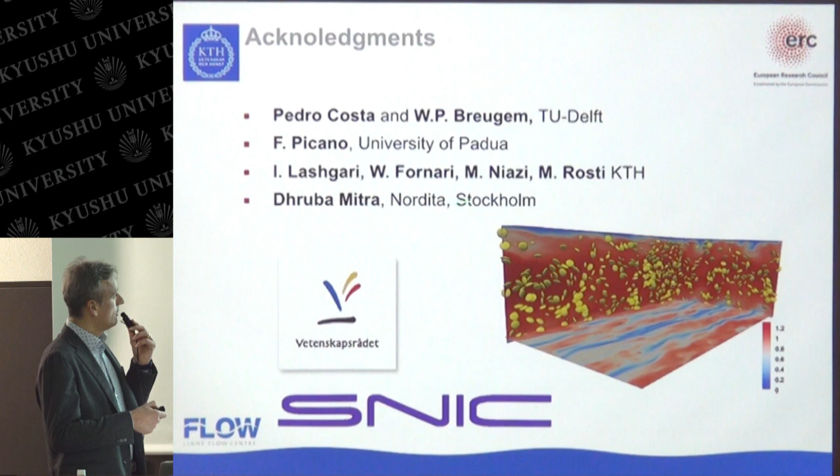Let's start by acknowledging many collaborators. We can start with, for example, Pedro Costa and Wilhelm Breugem from Delft in the Netherlands, who contributed to the development of the numerical code. Then we have Francesco Picano, who was a postdoc at KTH and now moved to Italy, University of Padua. I also listed here some of the students at KTH who were involved in this project, but also Dr. Mitra from Nordita, the Nordic Institute for Theoretical Physics in Stockholm.

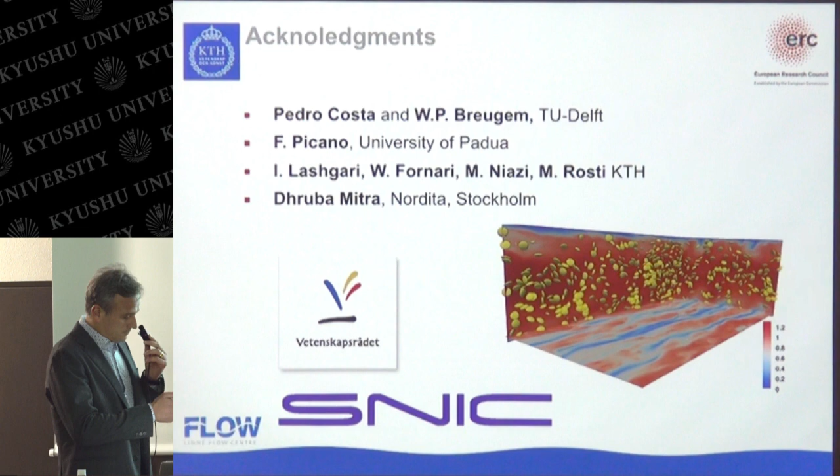So as we start, what we want to study is suspension of rigid particles, and these are found in many natural phenomena, for example pyroclastic flow, sediment transport, and many other applications. And of course these flows with particles are very important in industry.

One can mention that about 10% of the world's energy consumption is used to transport solid materials through fluids. So what we want to do is understand the transport and mixing in these suspensions that we find in many industries, fluidized beds - something I will shortly mention later - but also waste slurries, for example.

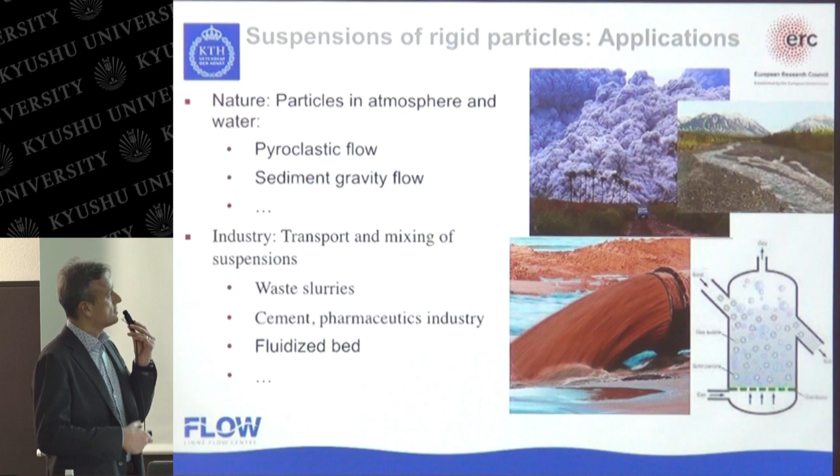So let's see if this microphone works. If we focus more on the scientific point of view, what is the scientific challenge here? Is it on? Hello?

So as we said, suspensions are everywhere. You can find them in several different fields. And from a scientific point of view, the motivation is to consider dense suspensions and to consider finite inertia. What I mean with dense suspensions is that the distance between particles is of the order of the particle size, so that we have to consider all possible interactions - collisions, short-range interactions, hydrodynamically mediated interactions - all contributing to the dynamics of the suspension.

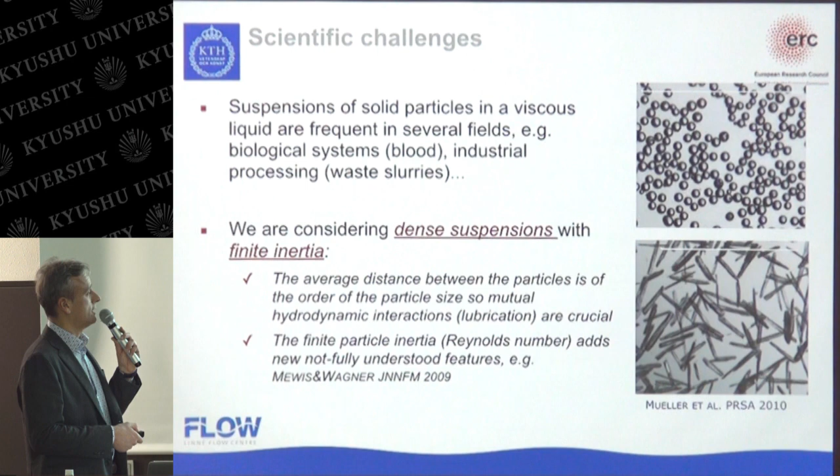At the same time, we will not study strictly the rheology of the suspensions, but we will assume the flow is happening at finite inertia, basically in practice finite Reynolds number, because that's the most common case in industry and in many applications. So we will consider the flow to become turbulent, not only simple laminar flows.

So this is more or less the outline of the talk. First, I will talk about the numerical tools, how we want to study these numerical particle suspensions. Then I will talk about flow in channel flows and the role of turbulence. At the end, I will include additional effects that we are modeling - particles of different shapes, heat transfer in the suspensions, and so on.

As I said, most of this work is based on large-scale numerical simulations, requiring typically from 1,000 to 4,000 cores for one case, for some of the cases I will show here. So we have to develop efficient and accurate algorithms that can run on these large supercomputers. When it comes to multi-phase flow, it's always a question whether one is doing real direct numerical simulation, or if there are models in the simulations. In our case, of course, we will have to model the interaction between spheres and solid walls, or collisions between spheres.

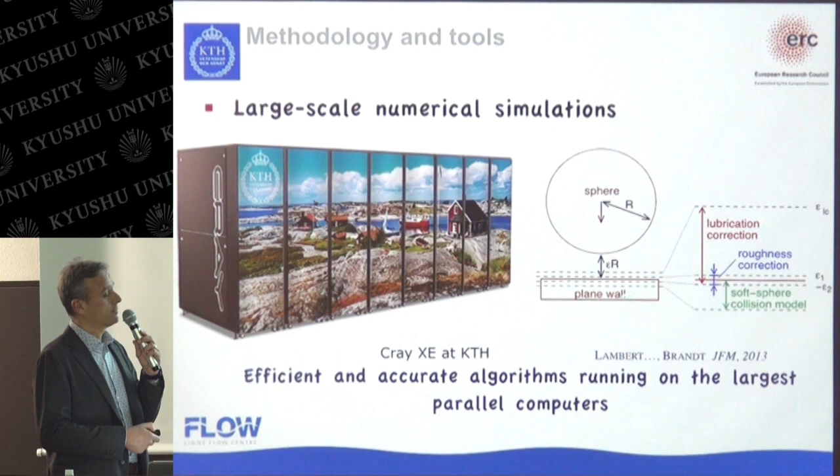So what we're going to solve is basically a Navier-Stokes equation for a fluid, here written for an incompressible fluid. Typically we consider particles that are neutrally buoyant or slightly heavier than the fluid, so let's say this is a typical equation for water, governed by this Reynolds number.

And then we solve the Newton-Euler equation for spherical particles, or for particles of different shapes. That's basically an equation for the linear and angular velocity of the particles in the flow.

The problem, of course, is what is called the curse of the boundary conditions. Basically what we have to do is impose a boundary condition, which in most cases will be no slip and no penetration at the surface of these particles. And these particles are of the order of 50,000, 100,000, and they move in channels and pipes, meaning we need to impose boundary conditions on moving surfaces.

For the first part of the talk, this will be the no-penetration condition of the fluid into the solid particles. But as I'll mention briefly at the end, we are now looking at evaporating droplets for fuel sprays, for example, where we'll also have boundary conditions on heat and mass transfer across this interface.

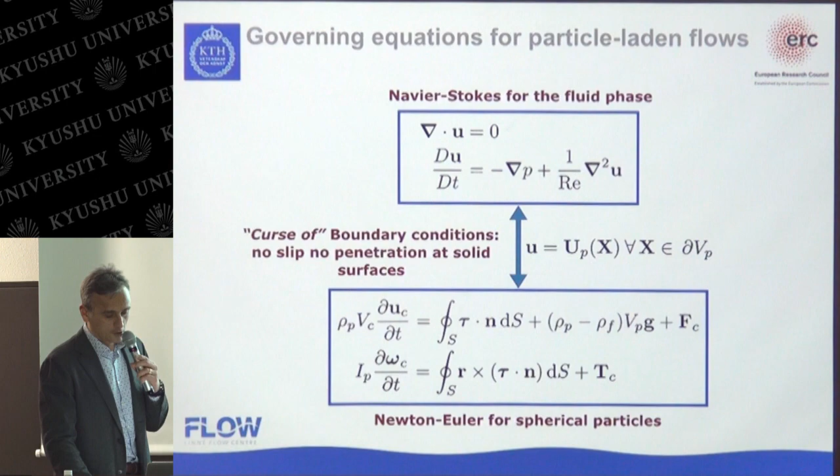But for the first part, we will talk mainly about these rigid particles and how we model the boundary conditions. This is done by what is called the immersed boundary method.

Basically, the method reduces to solving equations on two different grids. This red mesh is basically an Eulerian grid — we mesh our domain, which could be a channel or a pipe, and then we solve the Navier-Stokes equation for the fluid phase on this regular Cartesian mesh, which can be done efficiently because it's a very standard approach.

But then when it comes to the solid body, we basically assume a set of uniform Lagrangian points attached on the surface of the particles, in this case a sphere. So we have these black dots which represent a mesh on the surface of the particles, and they are more or less equally distributed.

In this way, we don't need to follow the particle, but we can keep the same background mesh and just add an additional forcing term into the equation for the fluid. This additional forcing term is basically mimicking the presence of the particle.

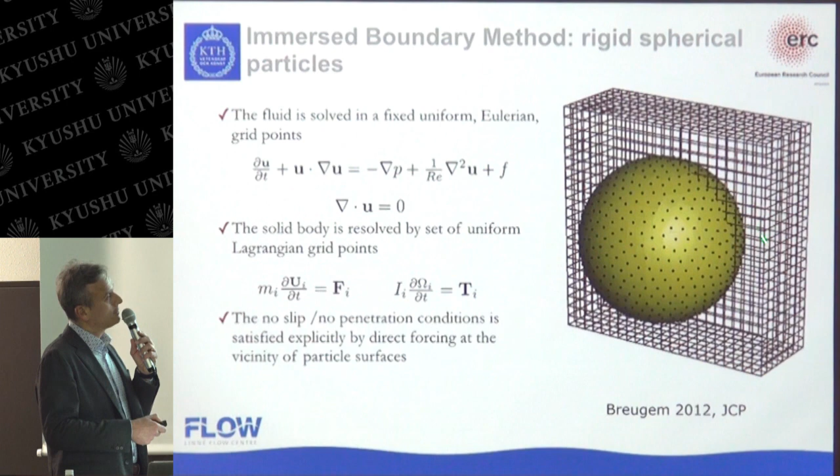Of course, this requires additional computational costs, but not as much as remeshing and following different particles. This will also require sufficient resolution — typically, to well resolve one particle, we need the diameter of the particle to span at least 24 grid cells.

Now, this is how we solve the equations for particles immersed in a fluid, but of course at some point we need models for interaction between spheres with each other, or spheres at the solid wall.

The thing is, because we use a fixed grid, at some point if a particle comes too close to the wall, we will not be able to fully resolve the fluid in between the particle and the wall — we won't have enough resolution. At this point, we will have to model these interactions.

Basically, we implement corrections based on analytical solutions for interaction between two spheres, or a sphere and the wall, and these are added as corrections to the lubrication force between the sphere and the wall. Of course, we need a certain threshold below which we activate this correction.

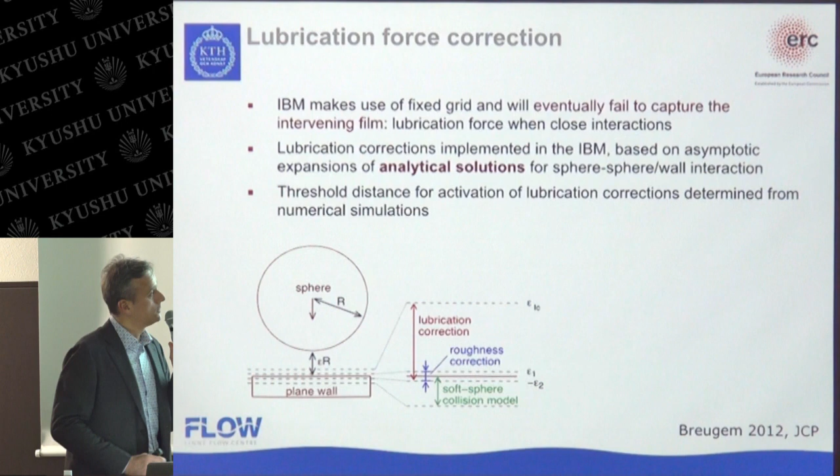So that's the first correction we do: we estimate better the lubrication force, the force due to the thin layer of film between the particle and the wall. The problem is that this analytical solution becomes infinite as the gap width goes to 0.

So at some point we cannot let this distance go to 0, so we introduce a roughness correction, so that when the distance between the particle and the wall is of the order epsilon, typically about 1% of the particle radius, we cut the lubrication force.

We assume there is some finite lubrication force due to the presence of roughness. But eventually, since we are considering turbulent and inertial flows, there will be a collision between the particle and the solid wall. In this case, we adopt some collision model.

We use the soft sphere collision model. The characteristic of this model is that it allows a little penetration of the particle into the wall, but still of the order of 1-2% of the particle radius.

This is done because we don't want to pay too much in terms of time step. If we have a more rigid collision, we have to decrease the time step. Allowing the particle to penetrate a little bit into the wall enables us to have a longer time step, so the simulation is more reasonable.

Okay, so this is the method. Basically, we have the particles immersed in the fluid, each particle associated with a Lagrangian mesh, and we track the particles into the fluid, then exchange forces between the fluid and the particle.

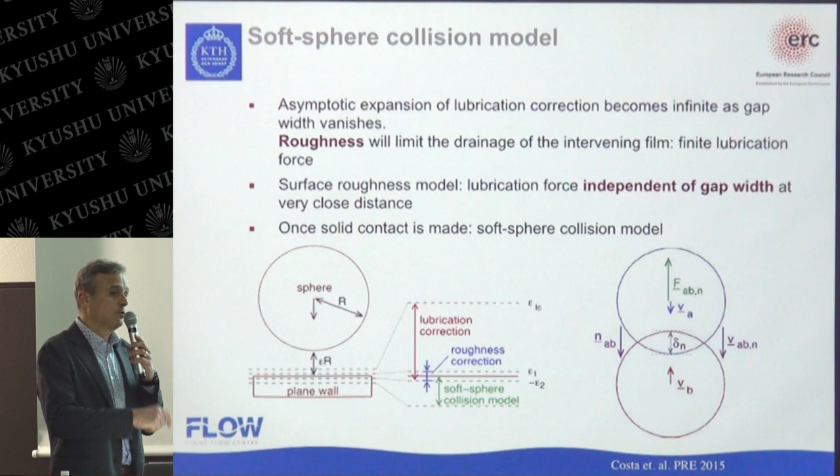So let's go now to the results. I want to first talk about the different flow regimes in channel flows, because this was already an open question when we started this, in 2012, 2013.

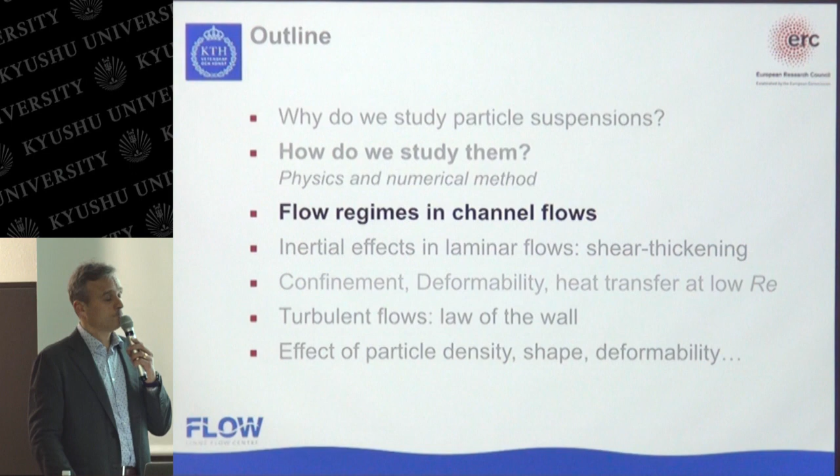So we want to know what kind of flow we have in a channel or pipe when we have many relatively large particles. We consider particles which are relatively large compared to the pipe diameter, as in many applications - for example, we have a project with Tetra Pak we'll mention later, where they're interested in transport of relatively large particles.

And so the question is, what type of flow do we have? First we want to refer to experiments by Matas, Guazzelli, and Morris, published in 2003 in Physical Review Letters, where they look at neutrally buoyant finite-size particles in a pipe, and look at the spectrum of the pressure drop between the entrance and exit to determine whether the flow is laminar or turbulent.

And so this is the results. This is basically the Reynolds number, a kind of non-dimensional inertia - so Reynolds number is proportional to the flow rate. And then we have the result, and this is phi, the particle volume fraction, the percentage of the volume which is the solid phase - so it could be 30% particles in a unit volume of fluid and particles.

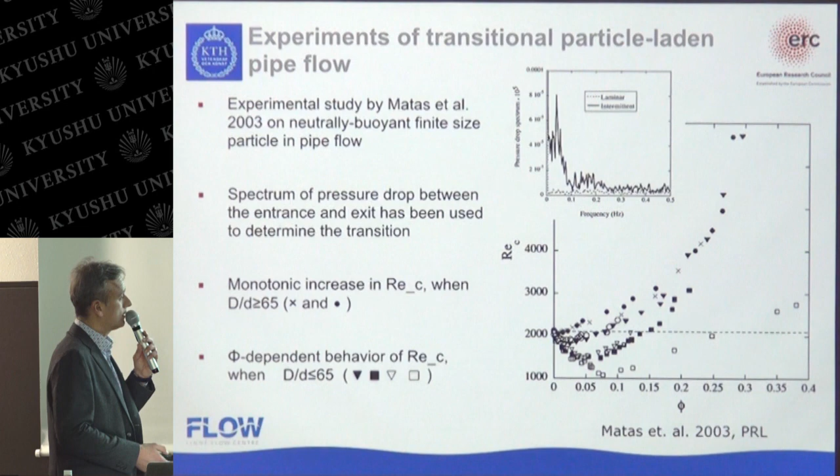So what we see is that there is a non-monotonic behavior for relatively large particles. The critical Reynolds number for the onset of turbulence first decreases, so it's easier to have turbulence, and then increases - so that when you have many particles, the flow seems to stay laminar for a longer period, which we'll show later is not really the case somehow.

These were experiments, so what they did also is say, okay, since we have particles in the flow, in water, what we do is consider an effective viscosity of the suspension, which is basically the viscosity enhanced due to the presence of the particles, as in classical rheology studies.

So you have an increased viscosity due to the presence of the particles, and by doing that, they see that if the particles are relatively small, about 1/50 to 1/60 of the diameter, the critical Reynolds number is more or less constant.

But for larger particles, we observe again a decrease in the critical Reynolds number, and then a kind of plateau. So they mentioned it's not clear what's happening in the flow with relatively large particles. It seems there is some additional dissipative mechanism.

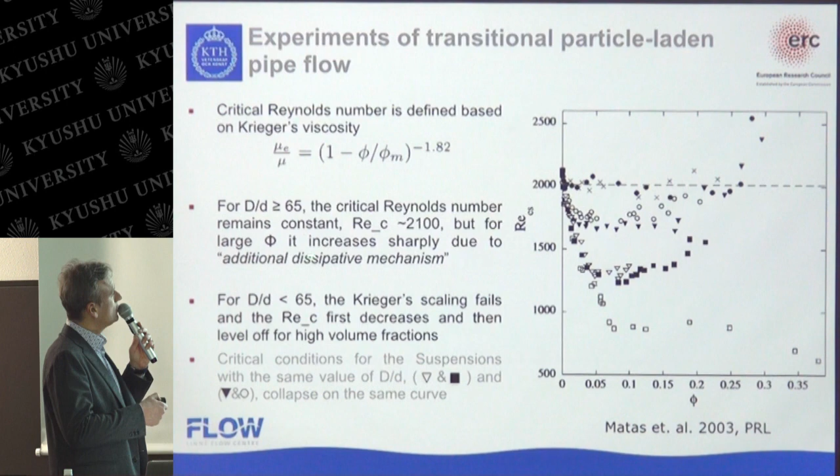More or less at the same time, as we started this work, a group in China, I think Tsinghua University, performed simulations with a method similar to ours, trying to reproduce the experiments. This is for one case, of course, since the simulations are very expensive.

At first, the critical Reynolds number, the onset of turbulence, is earlier, but as we increase the number of particles, the onset of turbulence is delayed. But when doing that, these authors also noticed they had somehow to find a way to define if the flow is turbulent or laminar.

They used as an indicator the kinetic energy of the perturbation, and selected a certain threshold. But they write in the paper that they selected this threshold such that they could get qualitatively good results, qualitatively reproducing the value of the critical energy.

But of course, this threshold, changing this threshold value will also change the results. So again, there is something that was not clear.

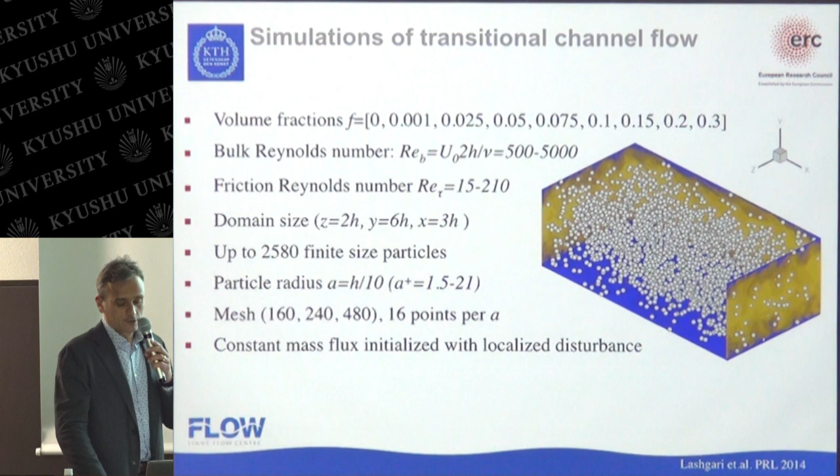And the particle radius is about 1/10 of the half channel width, which is exactly as one of the experimental data sets.

So now, first I want to show you what happens in the flow if we look at the velocity, the fluctuations in time of the flow. Basically, this is the kinetic energy of the streamwise velocity fluctuations.

We see that this is 0.1%, which is really like, I think, 5 or 10 particles in the whole channel. Red colors represent low Reynolds number, and more purple-like colors represent higher Reynolds number.

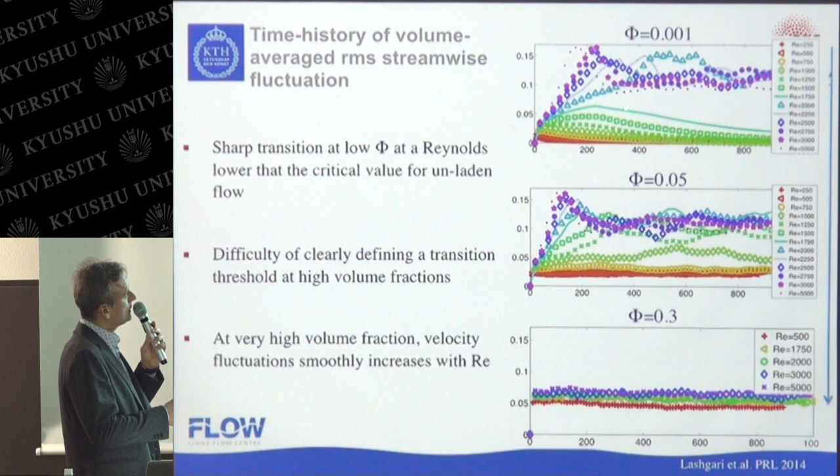We see that we excite the flow, we disturb the flow, and then as we wait some time, if the Reynolds number is low, the flow will be a little bit chaotic, and then the perturbation will decay, so that eventually we will get back to some kind of laminar smooth flow.

But if we have a higher Reynolds number, larger than 2,000, then we see that the flow will go turbulent, and we will have sustained oscillation fluctuations in the flow.

If we have 5% particle volume fraction, then in the presence of particles we can still distinguish two regimes. At low Reynolds number, the flow settles to some level of fluctuations.

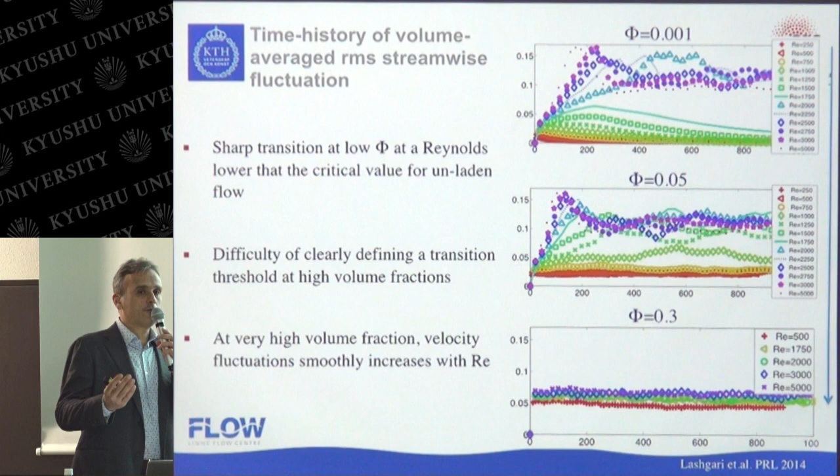Because of the particles transporting the flow, there is no more simple laminar flow, but there are anyway fluctuations, and there is some chaotic motion due to the presence of these many particles.

But if the Reynolds number is large enough, we see that the oscillation will settle to a level which is similar to the case with few particles, and this is more or less the classic turbulent flow.

But if we increase even more the volume fraction, more than 20%, this is for 30%, we see that now at 30% volume fraction, we transport particles, but the level of fluctuations in the flow is almost independent of the Reynolds number. Between Reynolds number 500 and 5000, there is a difference of only 5% to 7% in the level of fluctuations.

We see that this fluctuation is almost constant in time, and in this case, it's almost impossible to distinguish between some kind of smooth laminar flow and a more chaotic turbulent flow.

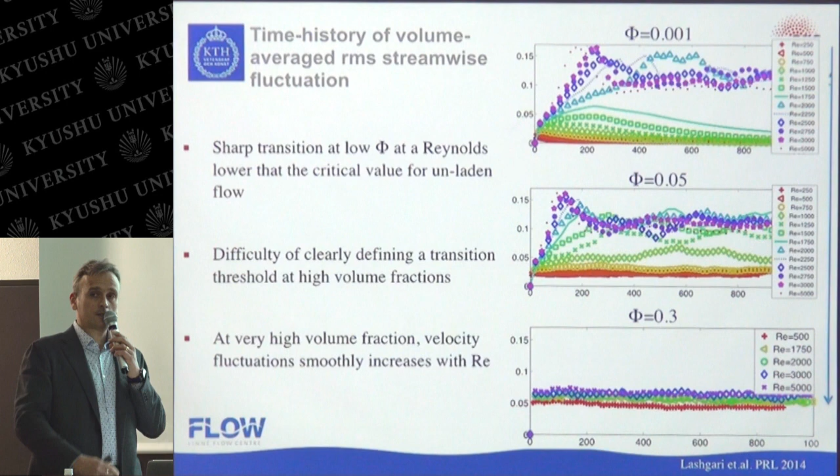That's the point that was also made by the other group doing simulation - they choose a threshold value to define laminar turbulent flow, but they didn't know exactly what was the best choice. So what we do now is try to analyze this flow, going back to a theoretical decomposition approach, actually due to Prosperetti and co-workers, a study from '99.

So what we do is take the momentum equation and average it over the fluid and particle phase. We do a phase ensemble average, so that we can write a momentum balance equation for the fluid phase and particle phase, where we have the contribution for the particle phase, for example here.

Now, this is the general form of the momentum equation considering all possible terms, but because a channel flow is a relatively simple geometry, everything is homogeneous in the streamwise direction, so there's no variation along the flow. It's a steady state, everything is symmetrical in the spanwise direction - this is an infinite wide channel. So all the main quantities only vary across the channel, in the wall normal direction, from one wall to the other. If you apply this symmetry, one can integrate and write that the total stress in the channel is basically proportional to the imposed pressure gradient driving the flow.

So the imposed pressure gradient is balanced by three contributions, where the first one is the viscous stress - viscosity times 1 minus phi, because viscosity acts in the fluid phase, times du/dy, which is basically the gradient of the velocity. So this is the viscous stress.

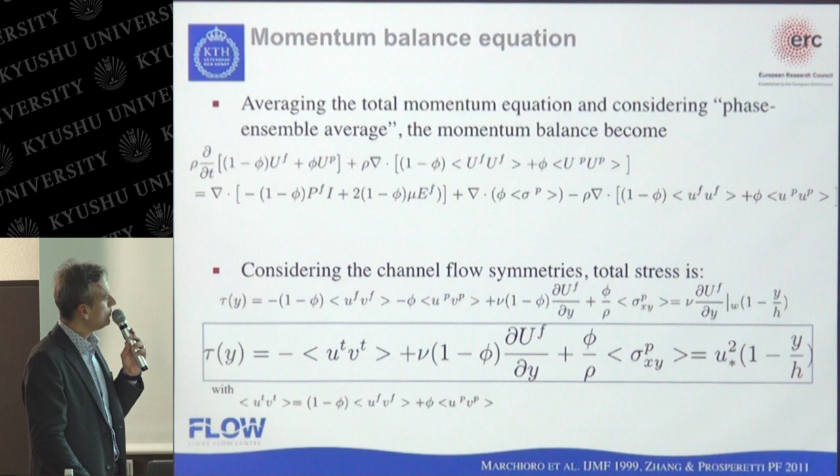So now let's see what happens. If you look at the momentum balance, the transport in the flow for all the simulations we performed, we could basically identify three different scenarios.

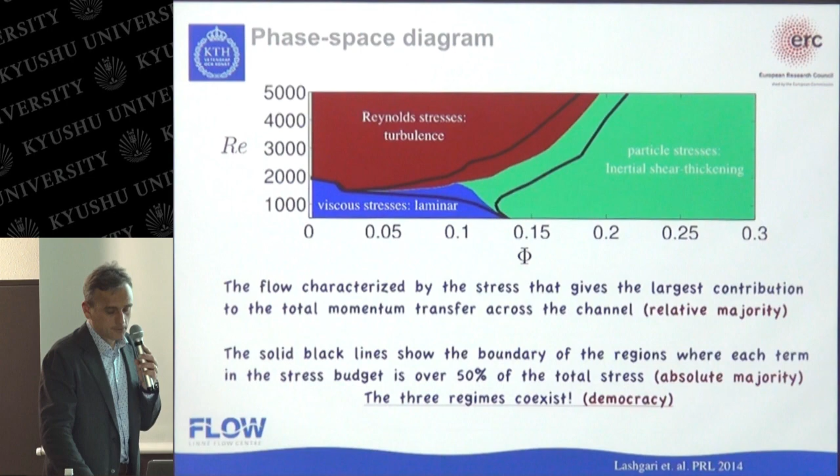So what is this idea of inertial shear thickening? In this region where transport and dissipation are dominated by the presence of particles, we have an increase of the dissipation, the relative viscosity, with the shear rate, at fixed volume fraction, with an increase of Reynolds number. We increase the speed, we increase the dissipation, but this is not associated with an increase of turbulence.

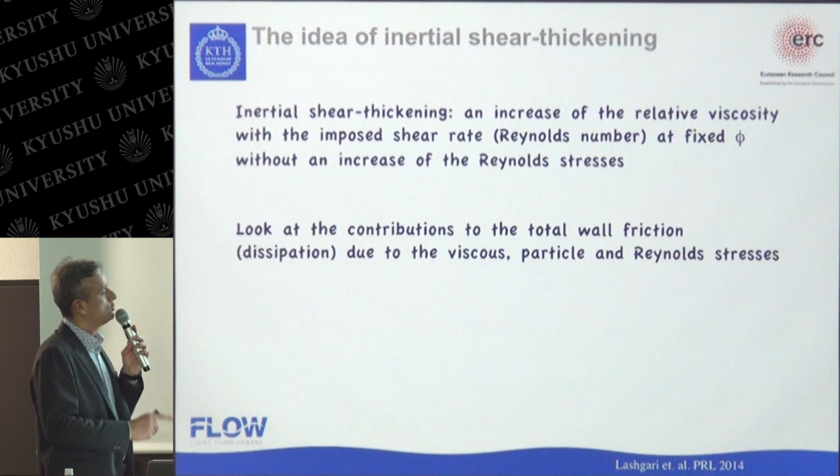So basically we have increased dissipation, but not a transition to turbulent flow. To explain this, we look at the total contribution to dissipation due to the different forces we have seen before, now along a line instead of on the map. At very low volume fraction, 2.5%, we see that when Reynolds number gets about 1,500, we switch from a regime dominated by viscosity to another regime dominated by the red, the turbulent stresses.

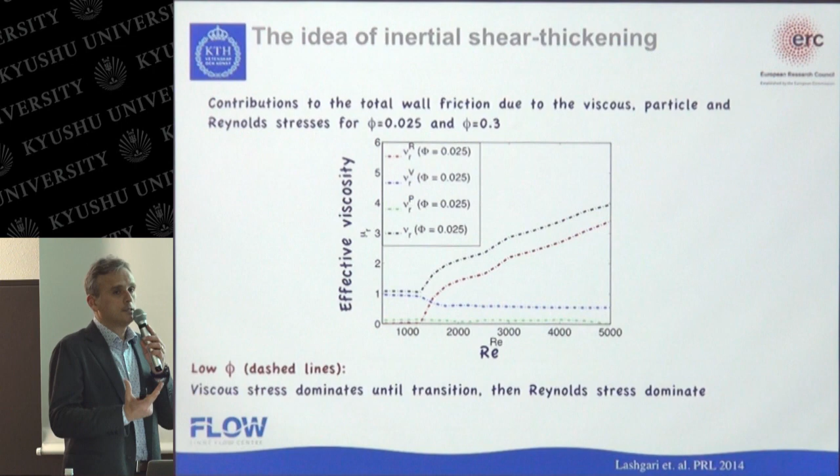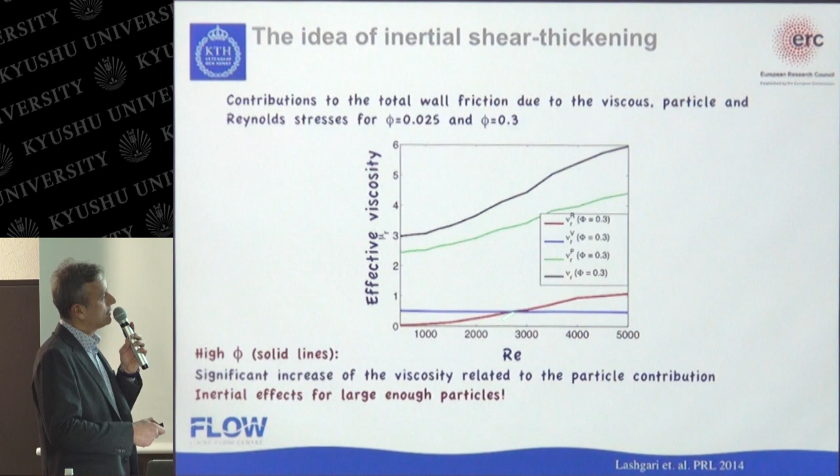So this is what we call inertial shear thickening. We increase the Reynolds number, we increase the velocity, and we have an increase of dissipation due to the particle stresses. There is not an increase in dissipation due to Reynolds stresses. I mean, they contribute, but the main part comes anyway from the particle stresses.

So to summarize what we have seen: if you transport relatively large particles in a channel or a pipe, you can identify three different regimes of transport: laminar flow, turbulent flow, and a regime dominated by the presence of particles. They are not really sharp, there is no sharp transition between one and the other. All these mechanisms are important and present, but it depends on different conditions which one is the most important. We have a region dominated by viscous forces, where Reynolds number is low, inertia is not so important, and particle volume fraction is not so high.

If you increase Reynolds number, then you get a turbulent regime, like particle-laden turbulence. We have an increased dissipation and mixing due to Reynolds stresses. In this case, you can retrieve the classical structures of a turbulent flow. I will show now some visualization.

But then you also have this third regime, which is dominated by the presence of the particles, which we call continuous inertial shear thickening. So with the presence of increasing speed, increasing inertia, we have an increase in dissipation in the flow.

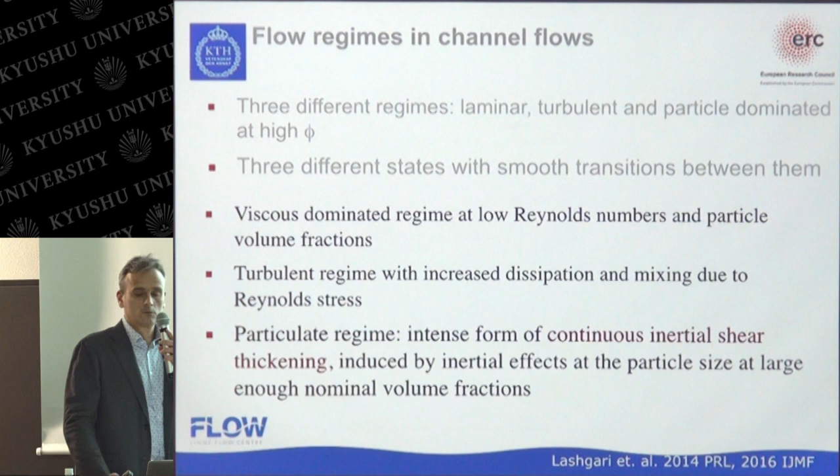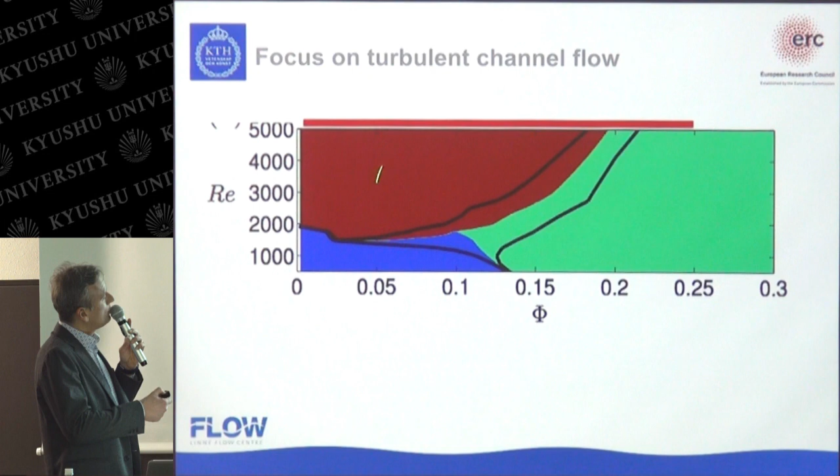Okay, now I want to talk a little bit more about turbulence, without clear transition to turbulence, without really the appearance of turbulent flows. I want to first say something more in general about the assumptions we did. Basically, now I want to talk a little bit about this region here, where the flow is turbulent, but of course the particles are present. Particles do not dominate, but they are relevant there.

But so what does it mean? This is a little bit limited by computational resources to some extent. So the question is more or less, what does it mean? What are we doing here, right? And what is it that we miss because of computational resources that, of course, are limited?

So if you take one example of transport of sediment, for example, or industrial processing, typically you have pipe diameters that can go up to 1 meter, so speeds that can go up to 10 meters per second. Reynolds numbers are huge — Reynolds number is basically based on the pipe diameter and the flow in the pipe; it can be 10 to the 7. If you build the Reynolds number based on the friction of the wall, as typically done in turbulence, it's of the order of 10 to the 4, 10 to the 5.

If you do simulations, basically what we do is we assume channels which are maybe 1 centimeter, 0.5 meters per second, and the Reynolds number is 6,000. We now did also 15,000, but the order of magnitude is obviously smaller than this. The friction Reynolds number based on the friction of the wall is now of the order of maximum 400 we did, compared to something like 10,000. So there is a disparity of scale of Reynolds number here.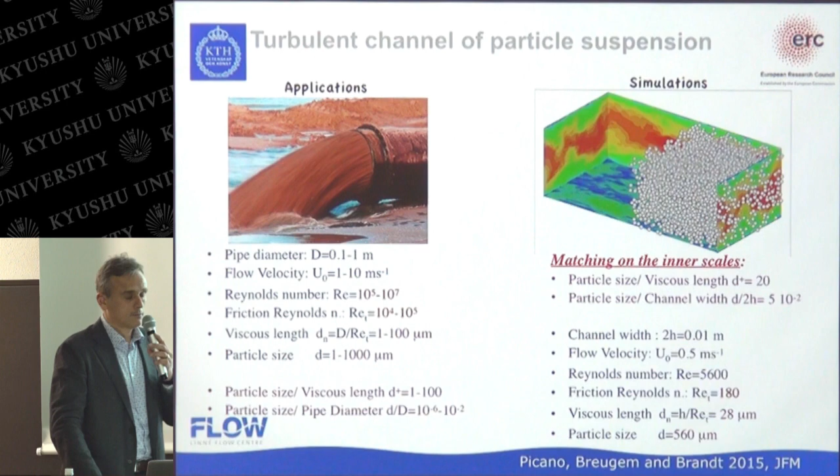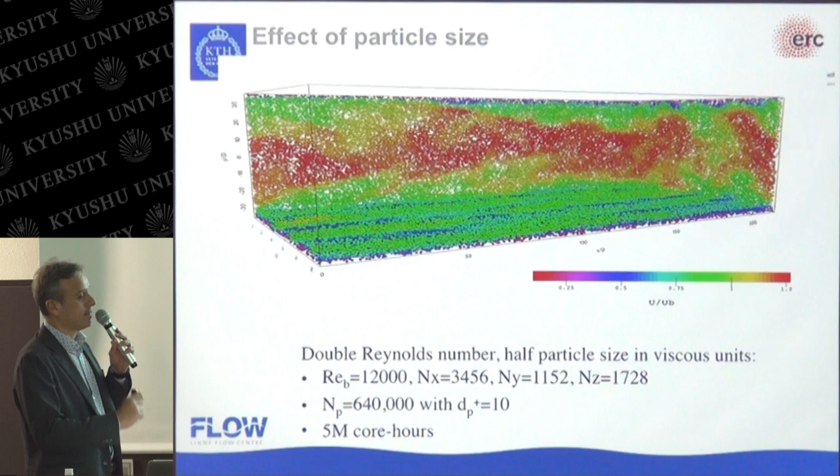This is an example from the largest simulation we did. The Reynolds number is 12,000, and we use 640,000 particles, which are now 10 in plus units, so they are relatively small. We have some animations.

You see now, this is a side view of the particles. These are only the particles seen in this movie, and they are colored by their velocity. Red is faster, the velocity in the center of the channel is faster compared to the one close to the wall. Here we see a view from behind.

The flow is going inside the screen. You see this structure of high and low velocity close to the wall that can also be seen here in the top view. This is a classical, typical structure you can find in turbulence, in single-phase turbulence, or without particles.

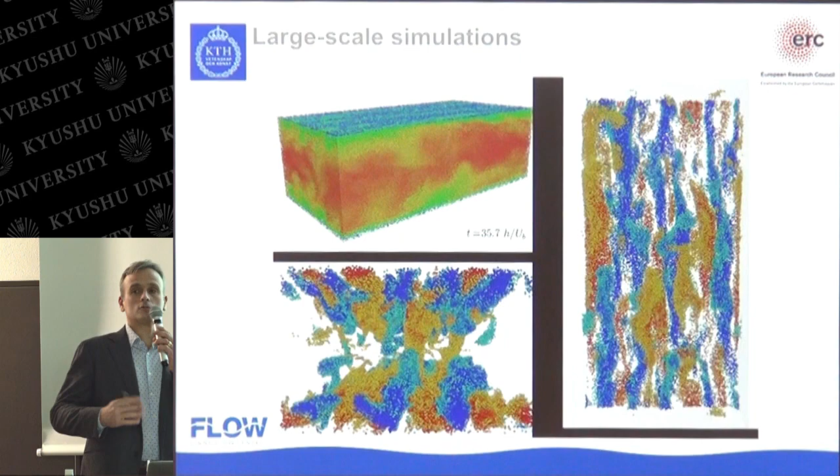So what we wanted to do here is to try to understand how we can model the presence of the particles in the channel. And this is a modeling we did.

Close to the wall, we assume that the velocity profile can only depend on the friction velocity and on a scale delta, which is small scale related to the viscosity. Far from the wall, instead, we have that the velocity profile will have to be a function of the distance from the wall normalized with the gap, basically with the channel size.

So if there must be an overlap within the region in the center of the channel, the near wall region, this means that y over u tau, du dy, which is basically the viscous force somehow, must be a constant. It cannot depend on the distance from the wall, it cannot depend on the viscous scales.

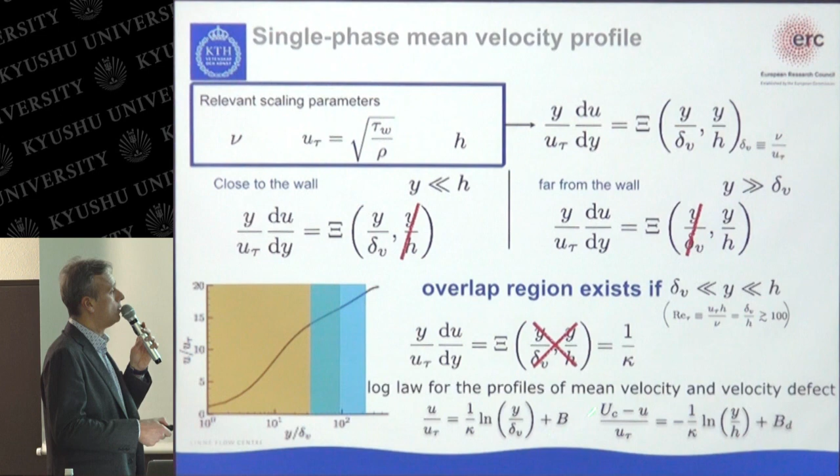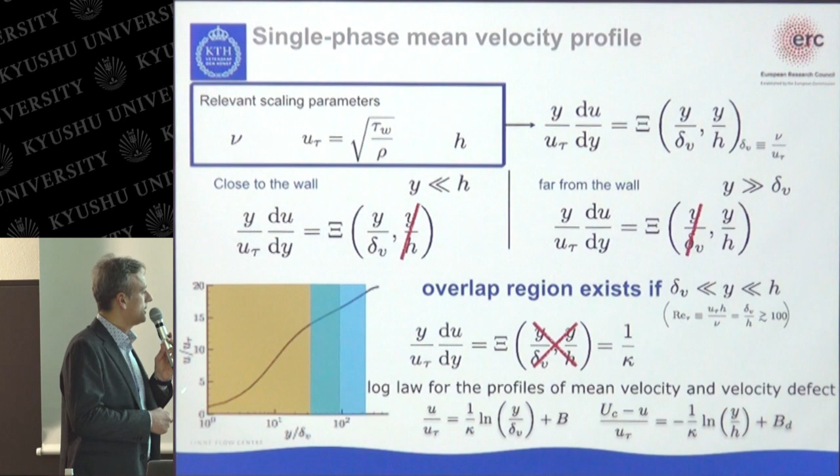This leads to this logarithmic law for turbulent flows that is used to model basically turbulence in many CFD applications and industrial applications, because instead of resolving the wall, which is very expensive, you can assume this logarithmic law and model the presence of the wall.

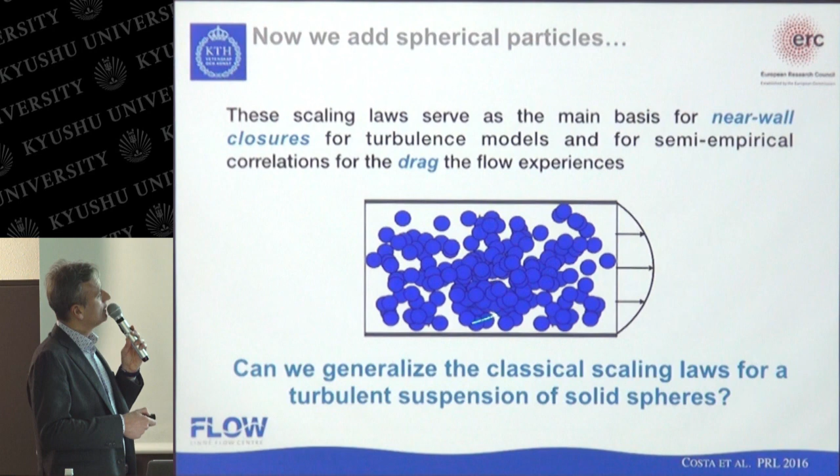So what we want to do is try to see if we can generalize these laws for near wall, and in the case of the presence of spheres, of solid particles.

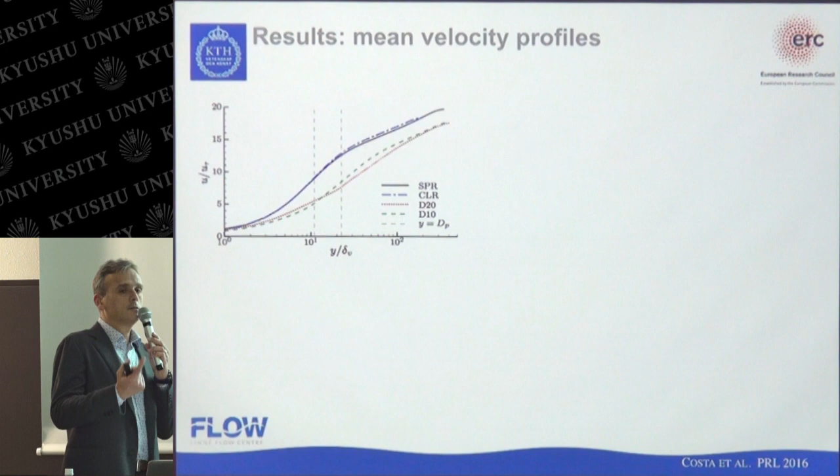Now what we observe here is that if we do simulations with the presence of the particles, which is this red and green, and we do simulation where we assume a continuum model, so we assume that there is still one model, a equation for one fluid with a modified viscosity and a modified Reynolds number, there is a big difference.

So there is no similarity if you assume that you can model the presence of the particle as a single phase flow with a modified viscosity.

But what if you now look at the velocity profile scaled with the effective viscosity? Then you can see that, okay, it's a little bit better, but still not a good model.

And this is because the particles are relatively large compared to the smaller vortices in the flow. Since the particles are relatively large compared to the smallest vortices, like 10 times, 20 times, then we cannot really assume that the particles are completely slave to the flow.

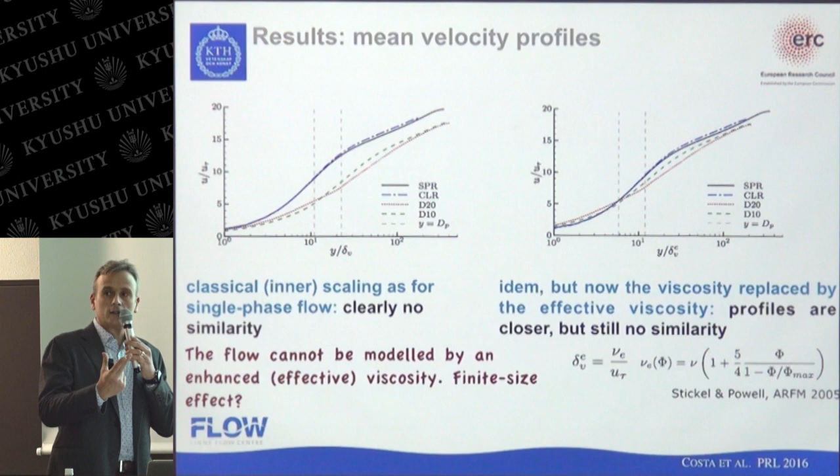They are not only changing the viscosity of the flow, they are really changing the turbulence. That's why this relatively simple model will not work. So what is the model based on?

Basically, we assume, by looking at the particle stresses we did before, that there is a particle wall layer. This is the sketch of the stresses. So it means the particle stress is dominant only in a region close to the wall.

So there is a particle wall layer where particles move attached to the wall, more or less like a porous medium, like a moving porous bed. And then there is a region far away, relatively far from the wall, which behaves as a homogeneous suspension region. That means there is more or less classic turbulence, but the viscosity is not the viscosity of the liquid, but a modified viscosity by the presence of the particles.

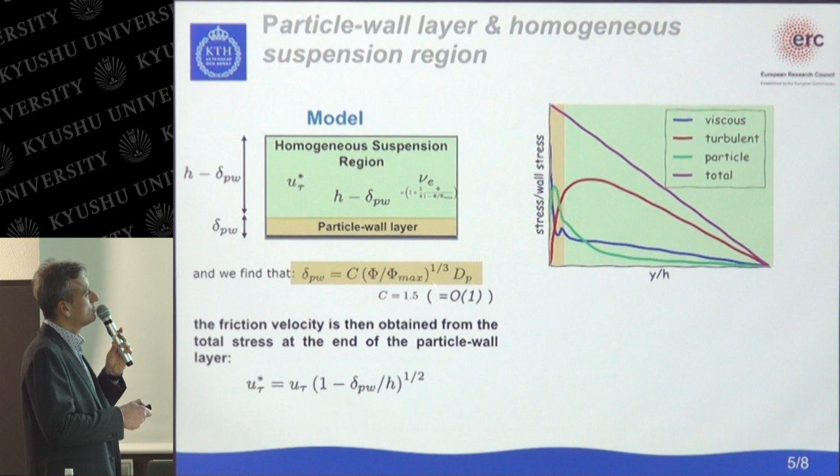We can estimate this particle wall layer to be proportional to the volume fraction to the 1/3 power and to the diameter of the particle. So this is really basically one particle diameter. This is a layer which is of the order of one particle diameter.

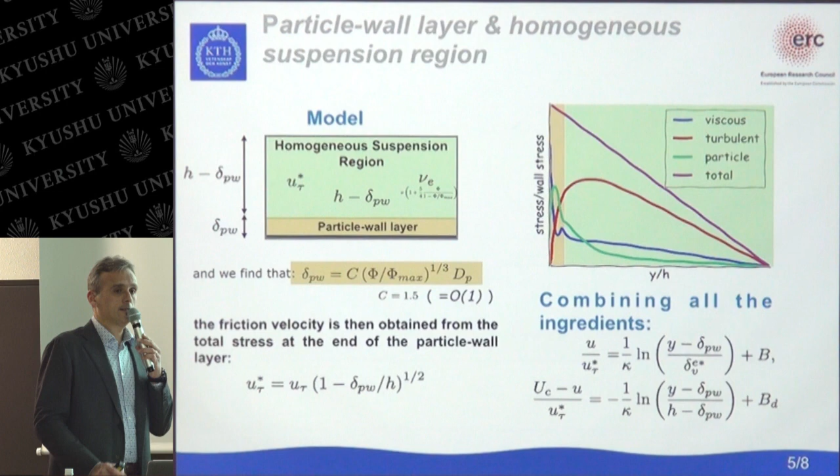You assume there is no real flow, but there is dissipation due to the presence of the particles—purely due to the particles. From that region on, you have a more or less classic turbulence, but with a modified viscosity. If you combine all of this, you can write an equation for the velocity where you basically shift the origin from the wall to the end of this particle wall layer, and shift the stress at the interface. If you do that, you can collapse almost all the velocity profiles into one line, and the same for the velocity far from the wall.

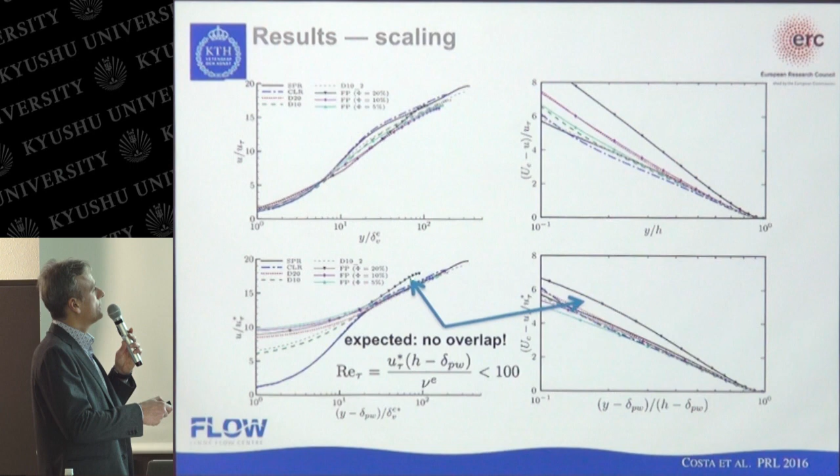There is one point we have kept here—these black points—but these are for a low Reynolds number, so in that case you cannot expect a real turbulent flow.

So by modeling this, we can extend it and predict the drag of the flow just by giving the flow rate. If you tell me the flow rate and the amount of particles, I can estimate the total drag, which is this friction Reynolds number, and the error is between 3 and 4%.

Why is that? Because we have assumed that the particles in the center of the channel are relatively small compared to the big vortices that are there, so they are kind of slave to the vortices and can be considered relatively passive. What they do is increase the viscosity of the fluid.

Of course the fluid with particles is more viscous because of the presence of the solid particles. But this will not work alone, because close to the wall, where the vortices are smaller, the particles dominate the dissipation.

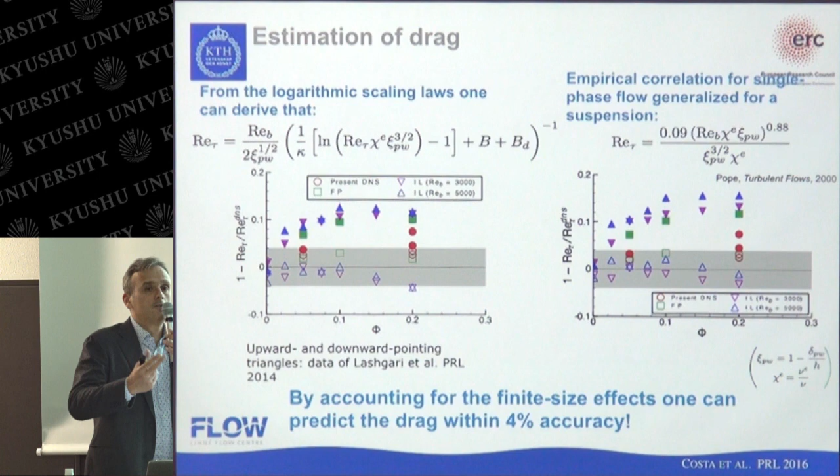So we have a region close to the wall where dissipation is dominated by the particles, and a region in the center where vortices and turbulent structures are bigger, where instead the particles just increase the viscosity of the fluid.

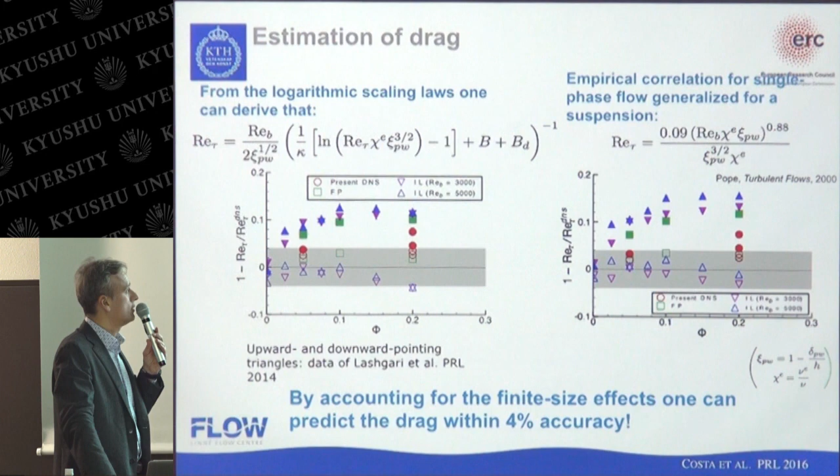So everything can be rescaled in that case, but only because we have taken into account the different behavior near the wall. So all of this was good, because we can understand the effect of particles in two ways: the presence of the particle wall layer, which shifts and basically creates a virtual origin for the mean velocity profile, and using an effective suspension viscosity.

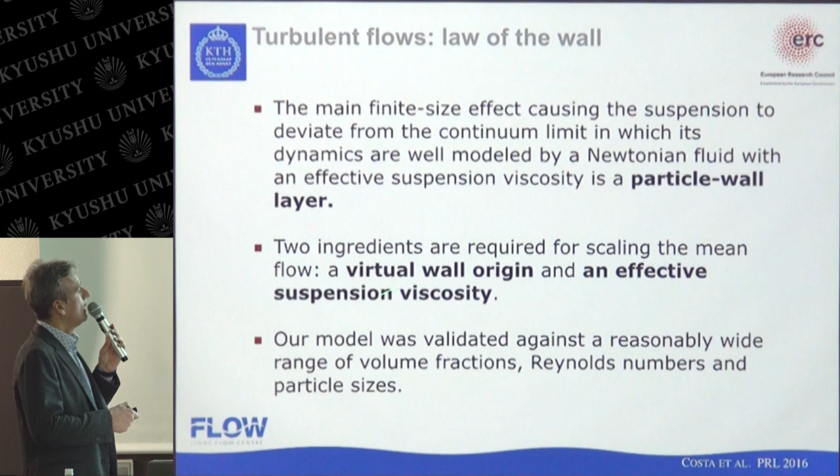So we have a modified viscosity for the part in the center of the channel, and we have validated this against several simulations, and more recently also against experiments.

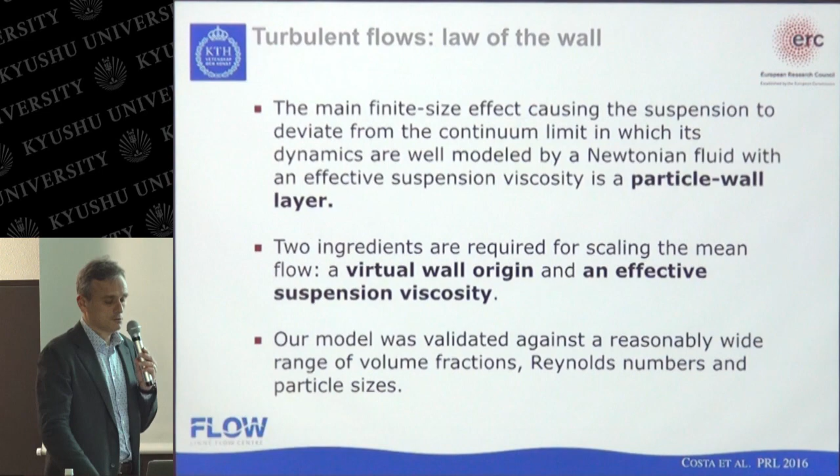But now, quickly, I want to mention a few more things, though less in detail. Our work was mentioned in this focus on fluids in the Journal of Fluid Mechanics, and then the question became: what happens if you change the density of the particles, the shape of the particle, and so on. So we started by changing the shape of the particles, and we realized that suddenly it becomes quite different.

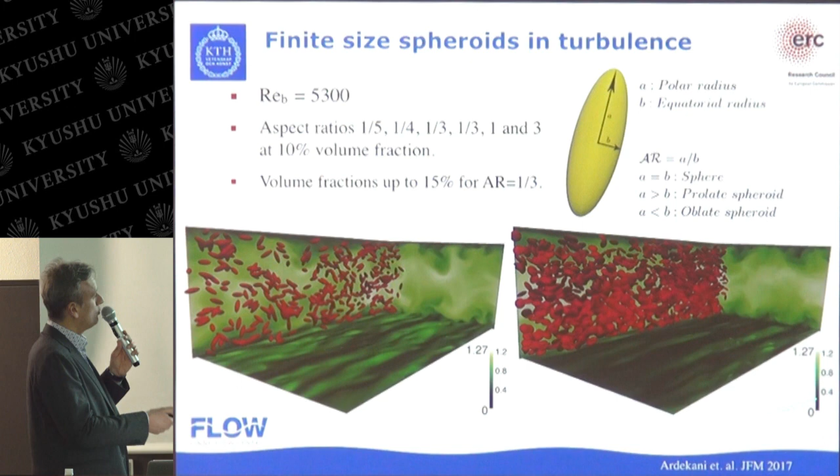So what we did, using the immersed boundary method, is take spheroidal particles. They can be prolate if the aspect ratio is larger than 1—like rugby balls, elongated particles—or oblate, disc-like particles, like coins or discs, when the aspect ratio is less than 1. So we put these different shaped particles in the channel and repeat the same simulation.

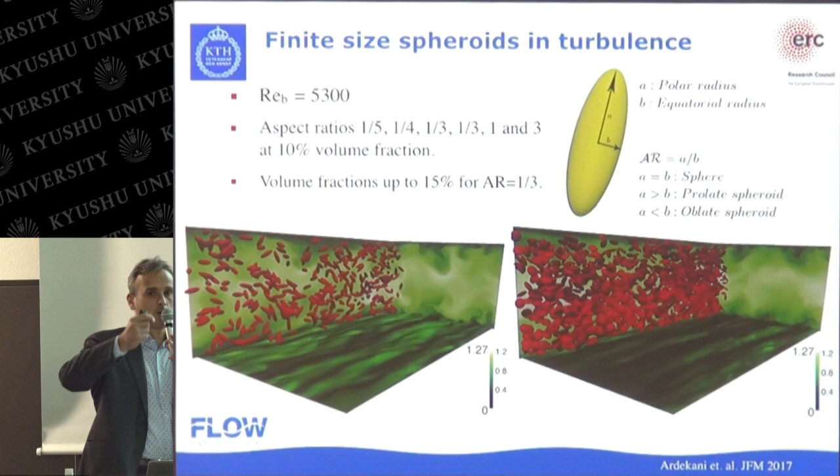Let's see if something changes, how important the shape is. Now the shape is not extreme here—aspect ratio is 1/5 and 3—but these are not really fibers, still aspect ratio 3, more like the balls used in American football, for example. This is because making them longer would be very difficult computationally, since you need to resolve the peaks, the extreme points of the particles.

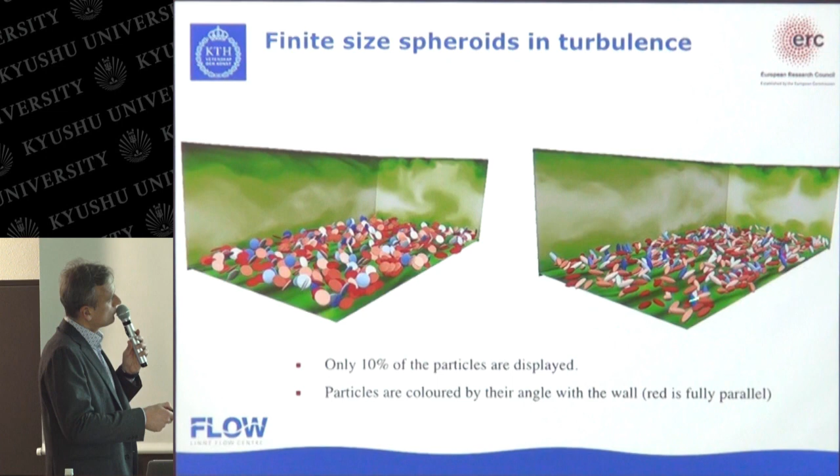So this is just one movie. We see these disc-like particles, how big they are compared to the channel, and these are the prolate particles, which are like elongated particles.

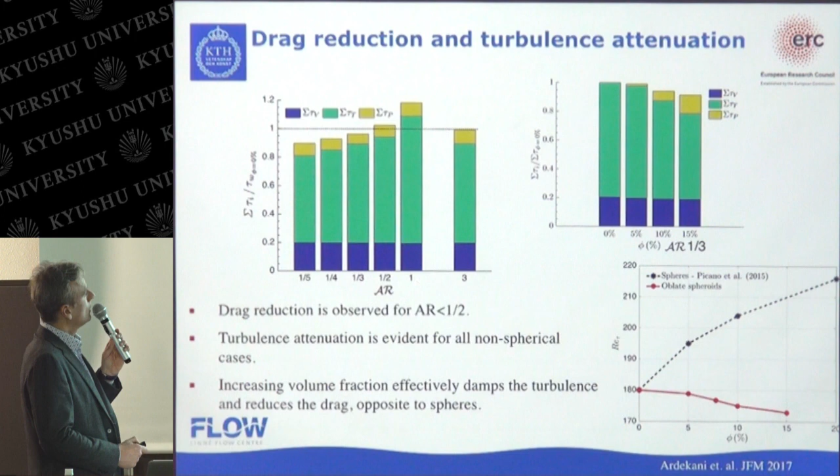Okay, so what happens in this case? This is now basically everything summarized here. This is the aspect ratio, from flat discs to prolate. This is spheres, aspect ratio 1 is a sphere, and 1 is the value of the total dissipation in the absence of particles. That's the single phase flow, normalized with the dissipation of that case.

So we see that if you take single phase flows and add particles, we have an increase in dissipation. That's the same you can see here. This is the volume fraction, this is the Reynolds number, which is basically the pressure drop, the dissipation. It increases when I put particles.

You see these are different contributions we saw before. The blue is the viscous stress, more or less always the same because Reynolds number isn't changed here. The only thing we change is the particle shape, keeping 10% volume fraction. The yellow is the contribution for the particles, which stays more or less constant, changing a little but not by much. What changes a lot is the green part, which is basically the turbulent contribution to total dissipation. So the shape has a significant effect on turbulence production.

In the case of spheres, which we analyzed in more detail at the beginning, we have an increase of the turbulence contribution, this green region. This can be explained by the presence of the wall layer, because particles moving close to the wall facilitate interaction between the central region and the wall. Somehow they lift fluid up, and so they increase turbulence production and Reynolds stresses.

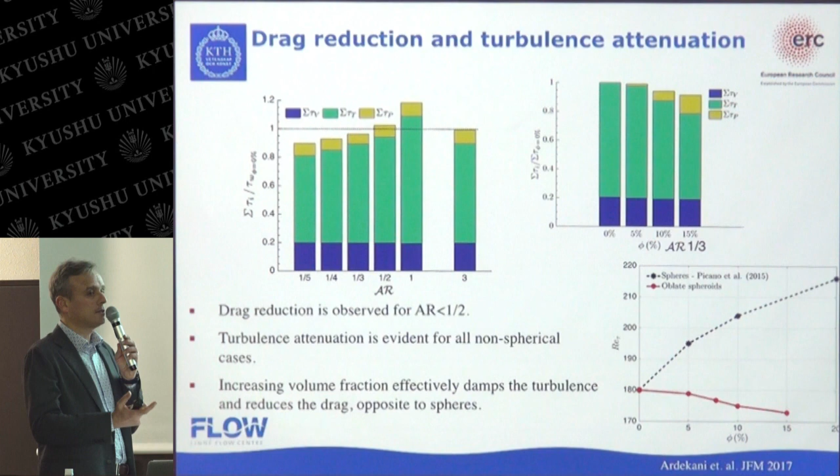If I have elongated particles, I also see a decrease of turbulence, so overall I get back to the value without particles. This is now the case where I increase the volume fraction of the oblate particles. We see that I always attenuate turbulence as I increase the number of particles. Of course this is compensated a bit by the fact that having more particles means more dissipation due to the particles themselves. So how do we explain this reduction?

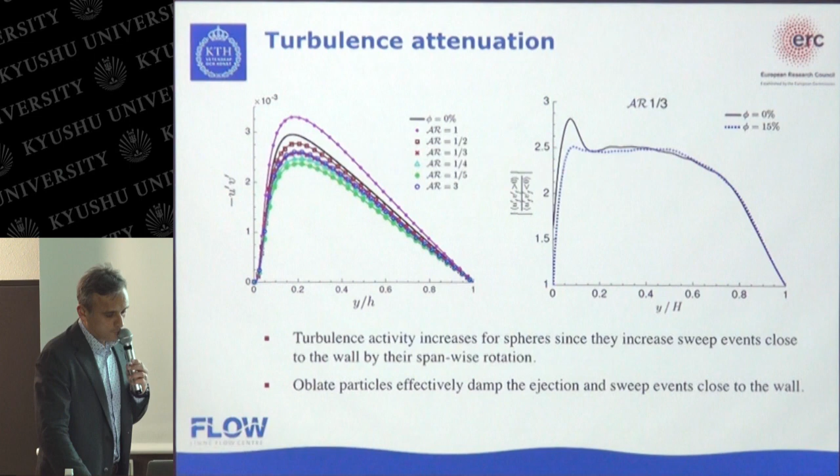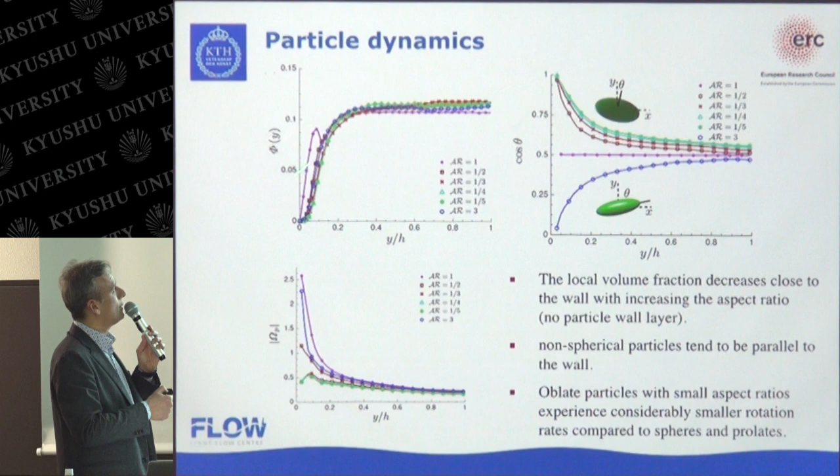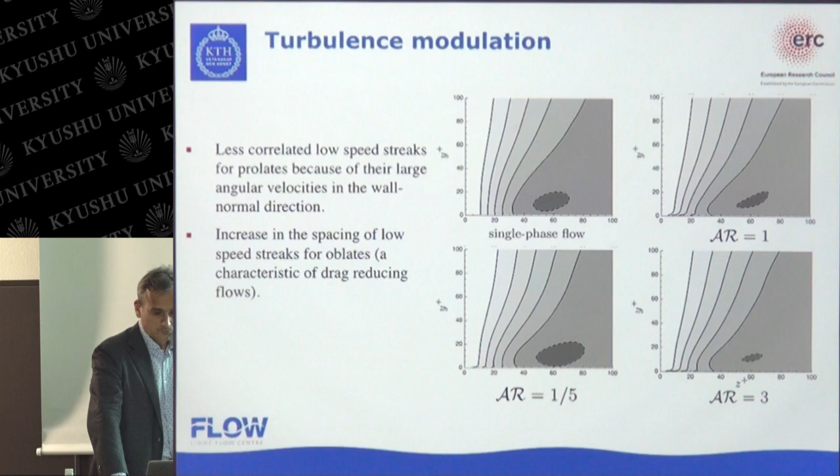So now, basically what we have seen is that we can have very different behavior as soon as we change a little bit the shape of the particles. The turbulence activity gets to lower values than those obtained only by considering an effective suspension viscosity.

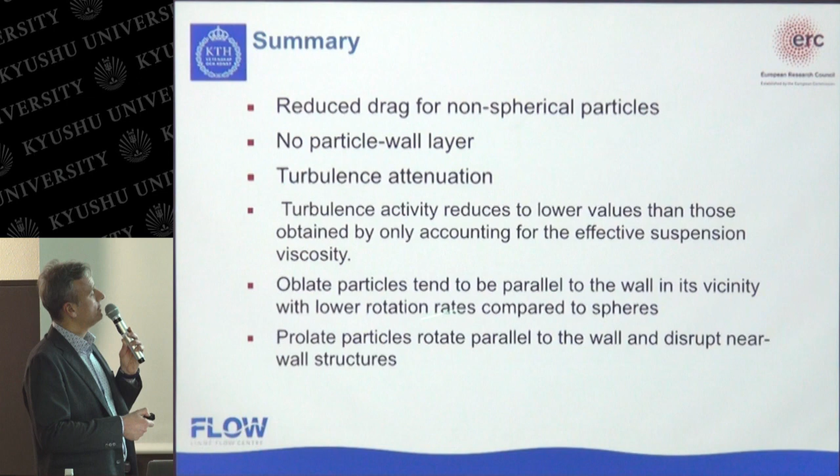This is because the oblate particles tend to be parallel to the wall, stay a little bit, and don't go too close to the wall. They stay in the vicinity of the wall and rotate much less than spheres.

So they kind of form like a moving carpet, moving parallel to the wall, and this dampens the turbulent fluctuations. Prolate particles have a similar effect, but they rotate a little bit parallel to the wall because they're elongated and can rotate around an axis normal to the wall. So in that case, they are not as effective as these flat, coin-like particles.

Okay, for 5 more minutes, I want to show a little bit what we're doing now, adding heat transfer.

We're doing simulation of heat transfer in fluidized beds and also in pipes.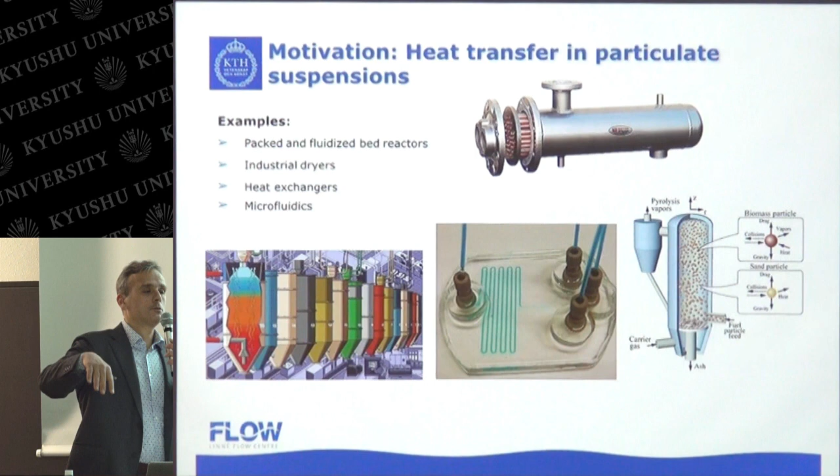What is important there is that, for example, they transport food. Of course, there is a pressure loss due to the food. But what is important is that while transported inside the pipe, the food stays above a certain temperature for a certain amount of time, because that food needs to be eaten and sold.

For sanitary reasons, it needs to be warmed up during the process, so that it's possible to sell it. So then what we did is we look at heat transfer in the suspension. We add an equation for the energy transport, the temperature transport, inside the fluid and combine it with the transport inside the particle.

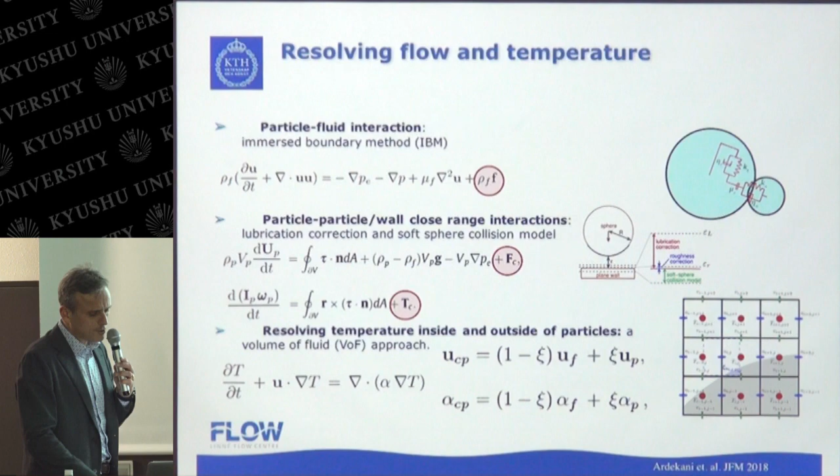In a similar way as for the particles themselves, but now we solve the temperature equation on both phases, so that we can have different heat capacity and so on. And then, we do the wall.

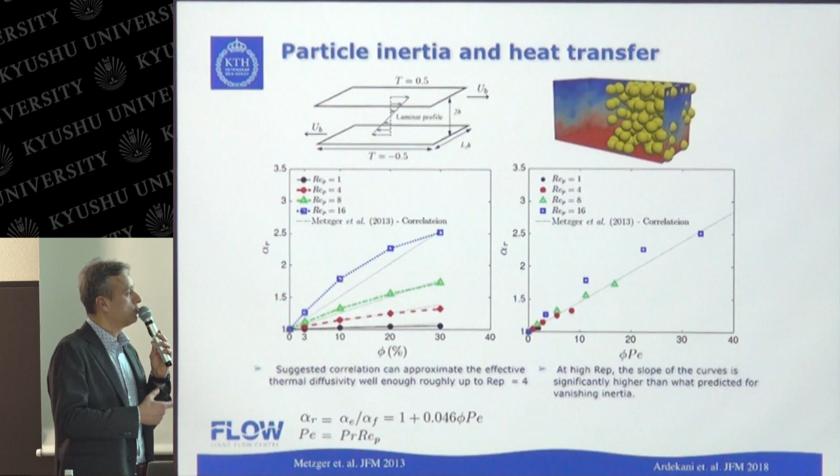That means that in this case where the Reynolds number is not 0, we have inertial effects, so there is enhanced heat transfer due to inertia, which was not in the model, in the experiment, so we cannot really match it.

Then we looked at pipe flow with particles of different sizes, large and small. This is really done in collaboration with the experiments and the industrial partner there. So, and then what we do, we look at heat transfer.

In this case, we have walls which are hot, and the heat is transferred inside. We want to make sure that the particle center reaches a certain temperature, let's say stays above a certain temperature during transport. And we see how the heat is transferred from the wall into the pipe.

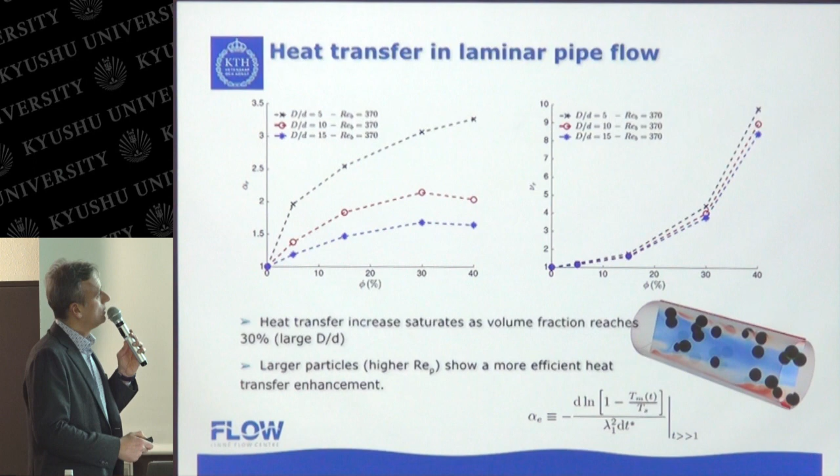Many big particles help heat transfer more than fewer smaller particles. There is a significant effect in heat transfer, so I can really have 2.5, 3 times more heat transfer with particles. If I look at the pressure drop, the dissipation in the flow, this is almost independent of particle size. So particle size in this laminar regime doesn't affect the dissipation in the flow, but it does enhance much more the heat transfer.

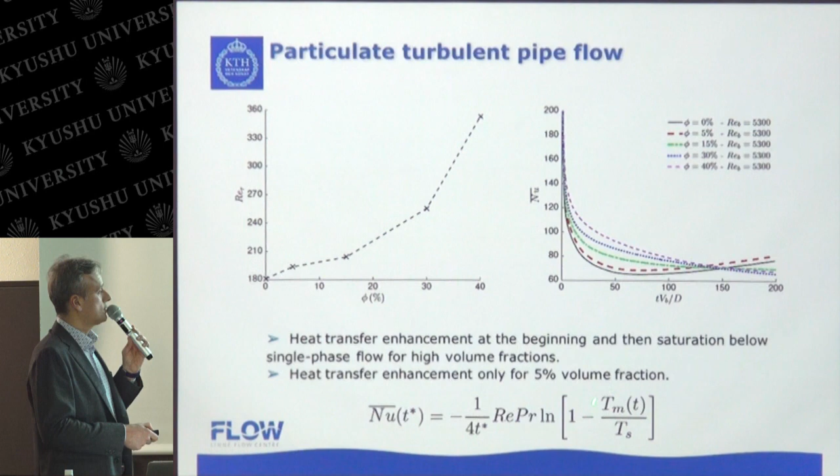Then we look at turbulent flows. Of course, turbulent flow now again, there are spheres, and now we have an increase in dissipation in the flow. And this is an integrated heat transfer, basically a non-dimensional measure of the mean temperature inside the pipe.

What we see is something initially surprising: this is the case without particles, and this is time as we start to warm from the walls. Initially, the temperature is lower in the case without particles, and then it gets above the case with 30 and 40% volume fraction. So heat transfer is initially more efficient in the presence of particles, but then becomes more efficient when you have few particles, like only 5%.

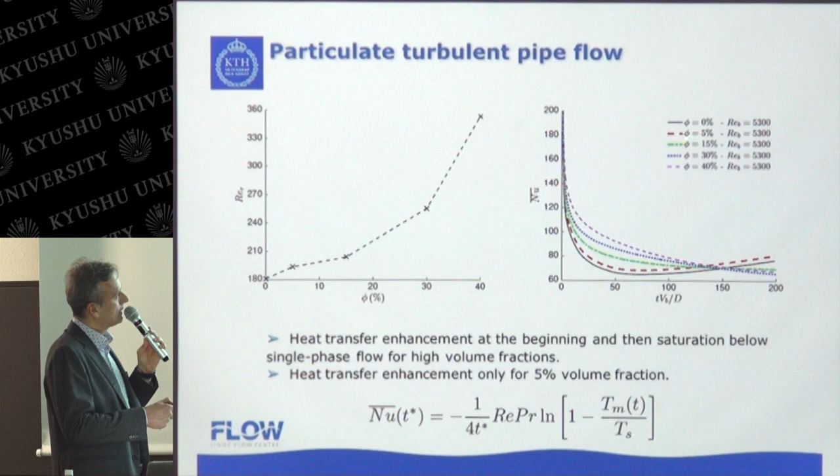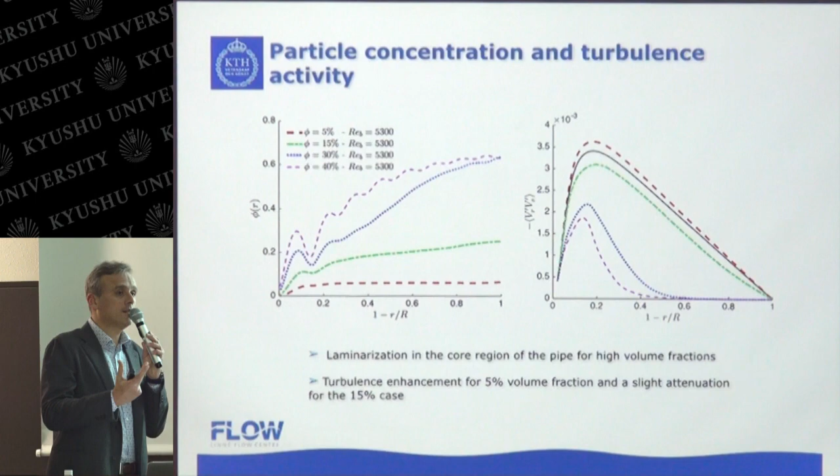So now we are back to that regime we saw before, where the transport or the dissipation is dominated by particles. In that regime dominated by particles, the fluctuations are small, and there is no correlation between the velocity fluctuations. That means that now heat transfer becomes less effective.

This maybe can be seen better by this movie, where we see that, okay, in the case with few particles, initially the heat transfer is slow, here it's faster, it got warmer here, it's more yellow. But then for longer times, the heat never really managed to come inside here in the core. So you see the core is warmer here than here.

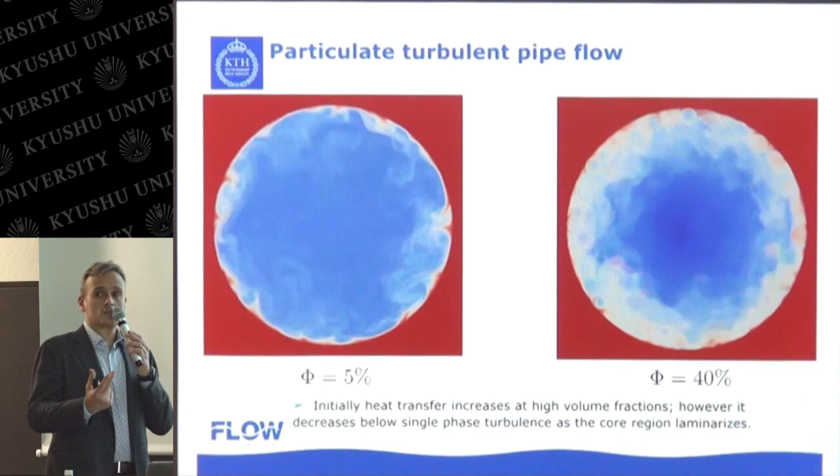Because here when you have 40% particle volume fraction, there are many particles, so it's not really a turbulent flow with strong fluctuations, and so the heat cannot really penetrate easily inside. Since we have strong dissipation because of particle stresses, but basically no Reynolds stresses, no fluctuations because of these many particles, heat transfer is slow here in the center. It's more efficient if you have less particles.

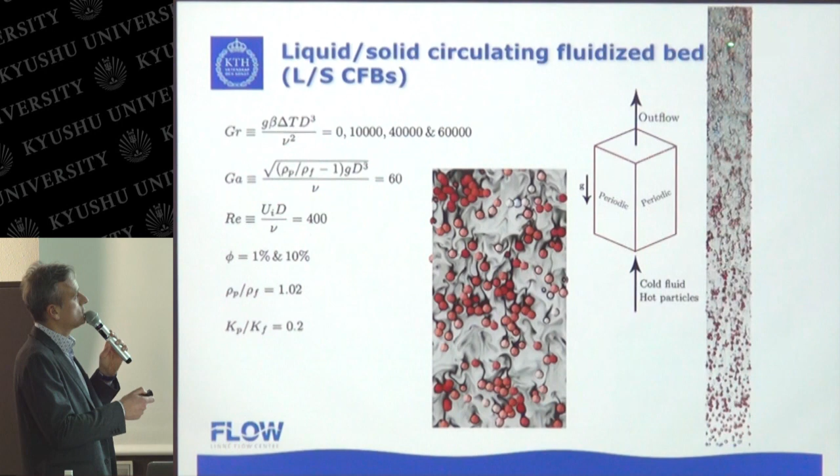Okay, now I finished. This is something we are doing now with fluidized beds. Basically, we have hot particles in a cold fluid. They are blown inside, and then we see how they cool and exchange heat with the flow as they move upwards.

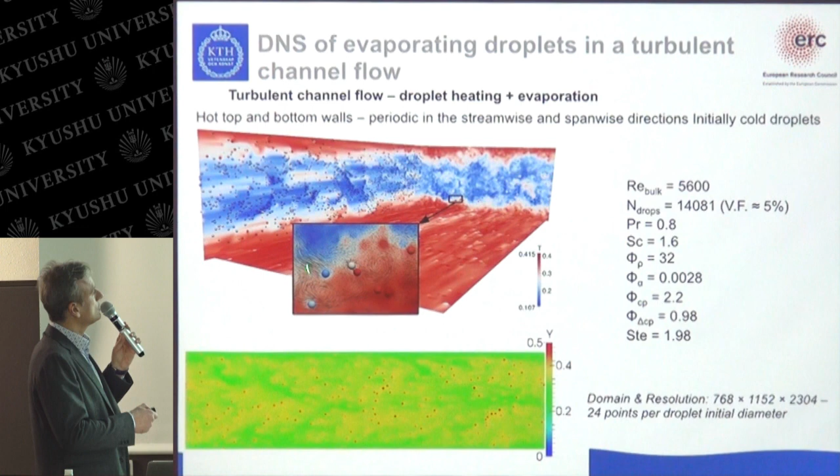This particle evaporates. So from a technical point of view, the particle changes size, so these Lagrangian points also have to change during the simulation because the particles shrink. That adds some additional complexity. And then also what we did now, we need more complicated boundary conditions because we need to impose continuity of mass and heat transfer at the interface.

So we need basically fluxes of heat and mass at the boundary of the droplet. To do this now, we cannot only use one set of Lagrangian points, but use a second set of Lagrangian points which extend into the gas phase, so that we can get estimates of the derivatives, for example the heat flux, the derivative of the temperature, or the derivative of the concentration, that we then use to estimate the evaporation rate. What we assume is that since these are small droplets, the temperature inside is uniform—since they are small, there are large heat fluxes, so it's very fast to reach uniform temperature inside the particle.

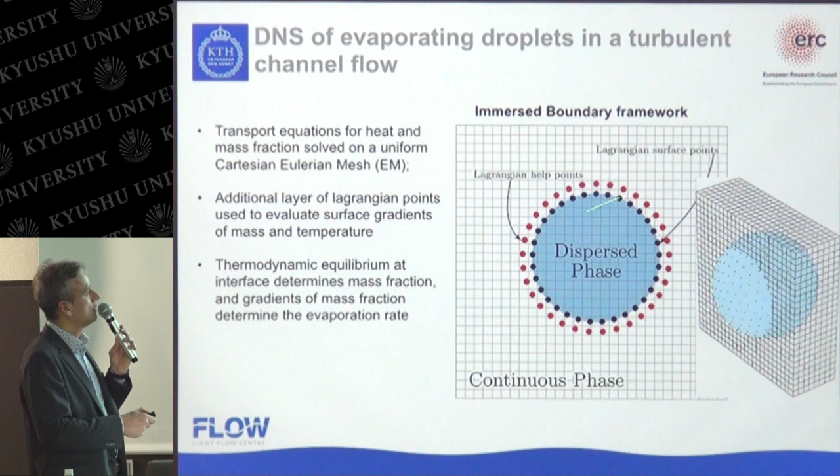Okay, I think that's it. Thank you.